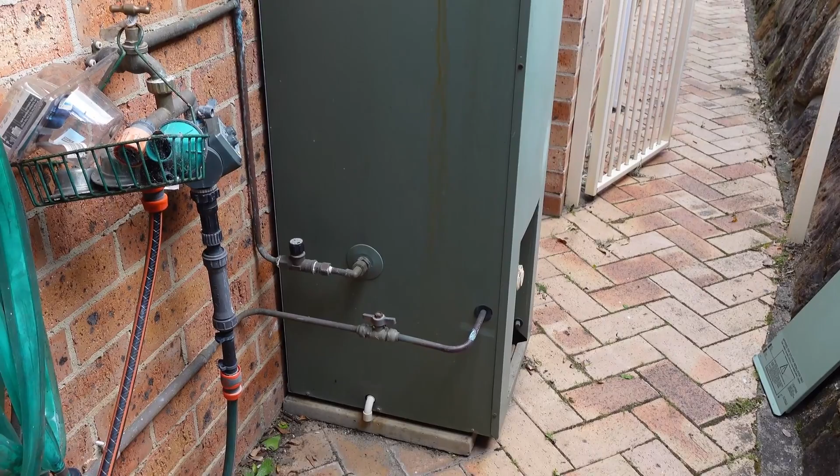Hi, I'm about to have my home gas hot water system replaced with a heat pump system. I've done several videos on this.

The whole idea is that we can use excess solar power. This is the only non-electric thing we've got left. We've got an 8 kilowatt nominal system spread over two different solar panel systems on the roof, one Enphase micro inverter system, one Sunny Boy system, but everything is electric. We've got the electric car, which we charge using the Zappi controller, so it's practically 100% powered from our excess solar energy, effectively a solar powered car, and everything else in the house is solar powered. The only thing left that's gas is the hot water.

We do have an outdoor barbecue, but we're going to change that over to bottled gas since we rarely use it, so a bottle will be fine. Instead of going with a solar hot water system, which would just take up roof space and only be used for hot water anyway, we'll go for a heat pump hot water system and see what the energy requirements are.

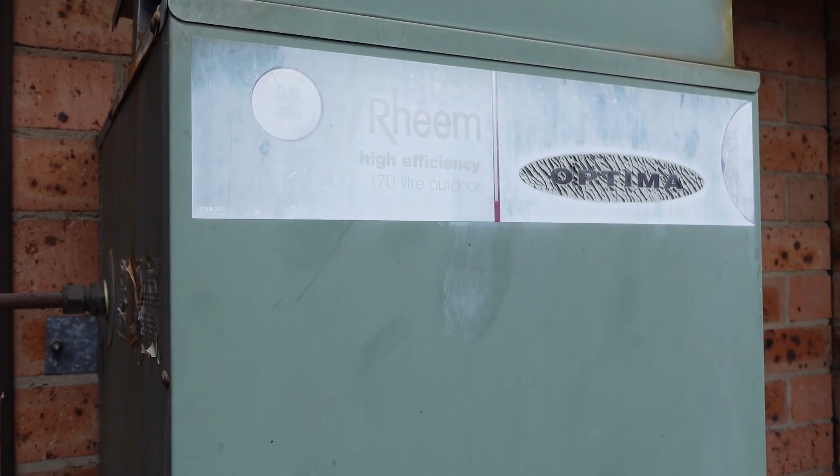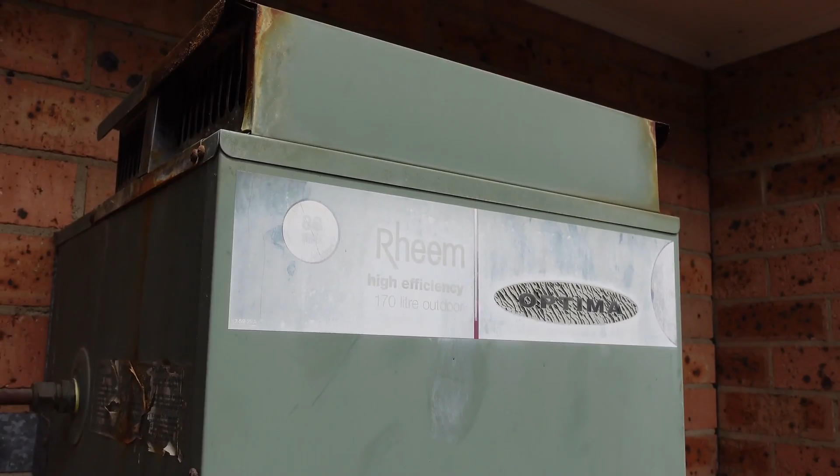Anyway, it's being installed tomorrow. So what I've got here is a Rheem high efficiency 170 litre outdoor unit. It's the 88 series, not sure if you can see that. It's really old, the original one that came with the house. The house is mid 80s, something like that. So yeah, it's still going, it still actually works, we've had no issues with it whatsoever.

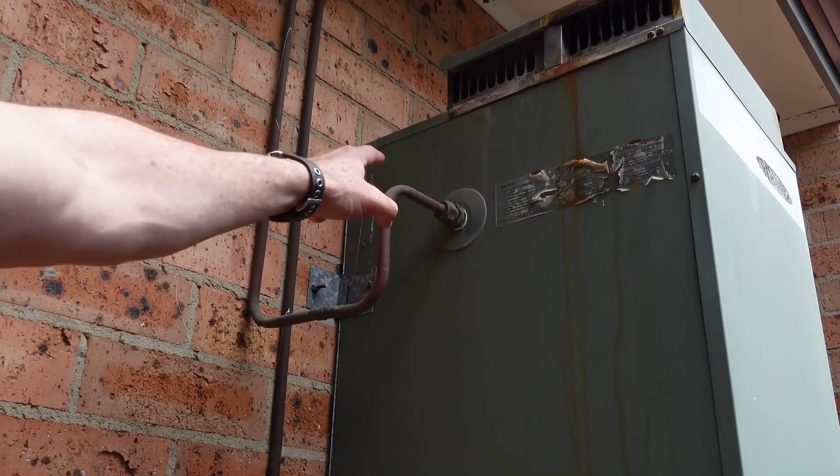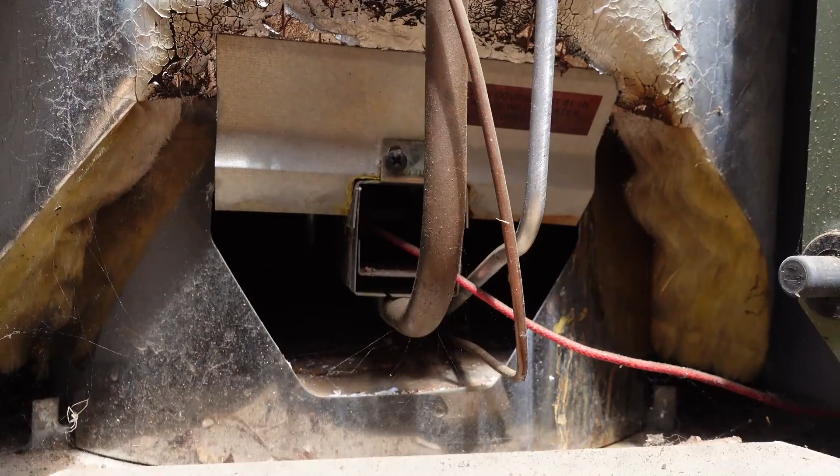Obviously we've got the gas inlet down here, this is the cold water in, and up here we've got the hot water out, and over here we have a relief valve. So I want to check the temperatures, and down here I've taken the panel off. You can see the gas valve, and the pilot flame is under there, we'll have a look at that. It's never gone off, well, maybe once, I think, in the 18 years that we've been here.

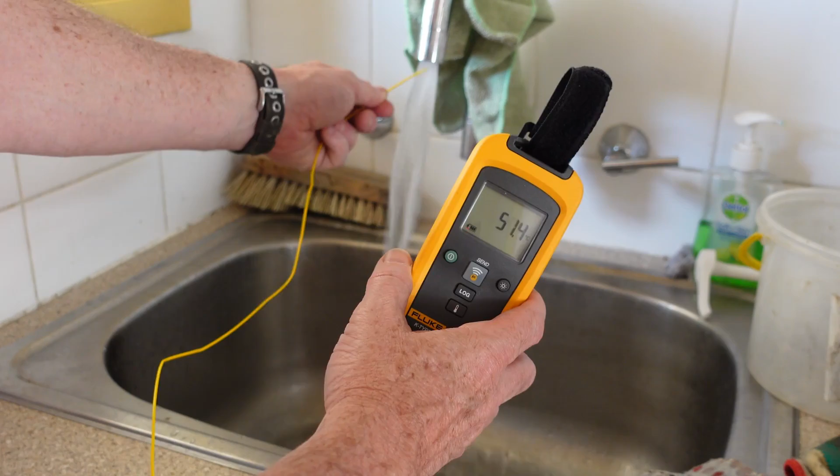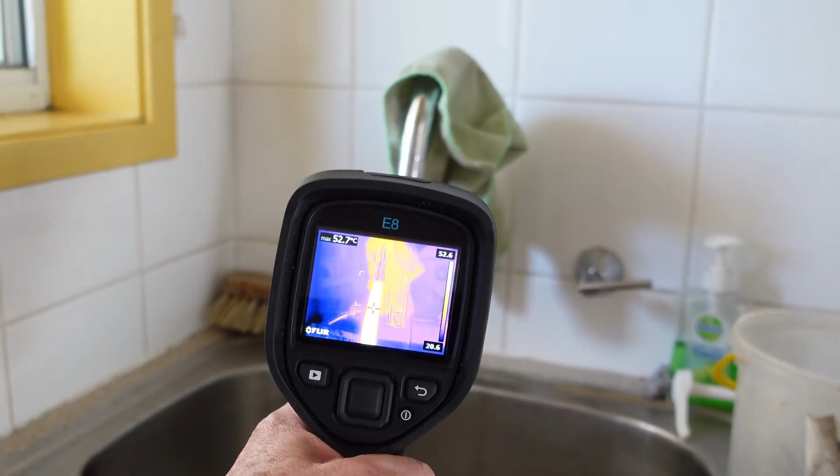This is in the laundry, and no, I don't think we have insulation on the pipes in the roof either. It doesn't seem to be a big deal here. I measured just the other day inside, yeah, 51. It's on par, or only a degree lower, than what we're getting coming out of the relief valve. Of course, there could be a tempering valve in there. I don't actually know what the temperature is inside the tank, but there you go. The thermal is showing 52.5, so I'm going to put that within the margin of error there.

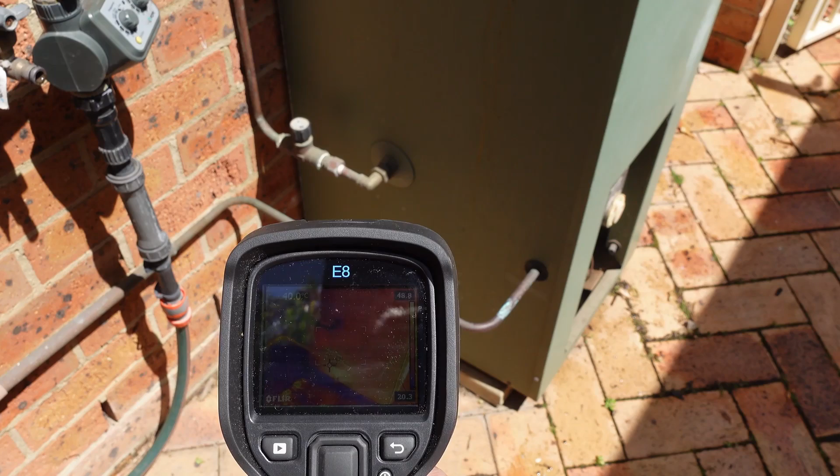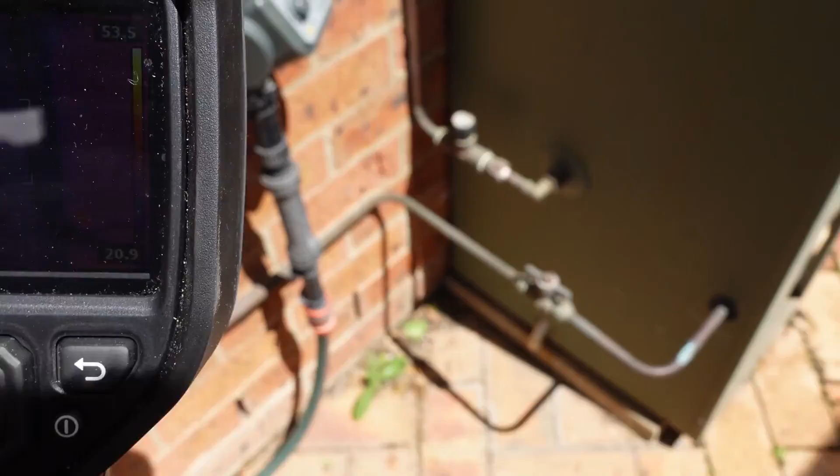If you leave it on for a while, the gas igniter should kick in and start heating up the tank again. Right, so I've still got that running in there, and I can hear it flaming away. That inlet gas valve is like 38 degrees, and the cold water, the coldest, is 20 degrees. So we've got 20 degrees coming in, and we can actually measure that here on the tap as well.

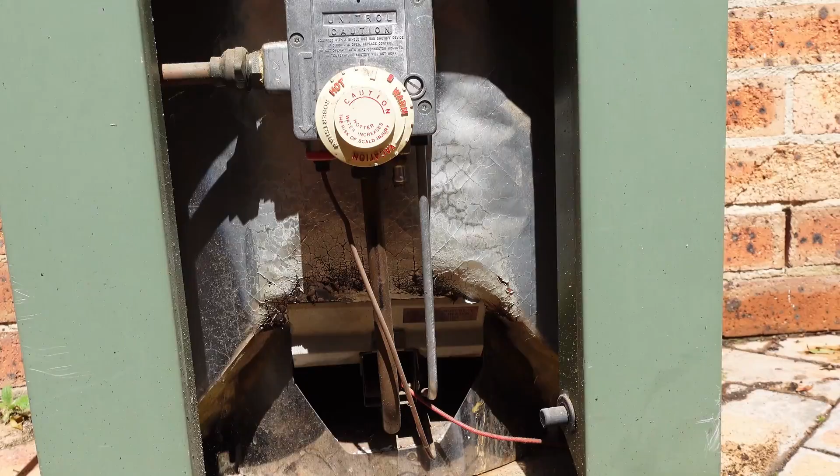I did measure that the other day, and I'm not sure if you can see it, probably not, but it's 247 degrees, because that's obviously the flame lighting this thing. So what the actual internal temperature is in here, I don't know. All we can get is the outlet, the relief valve here, but that could be coming through a tempering valve to prevent it getting too hot. I'm sure that's the case actually, and there's no direct temperature reading on the dial.

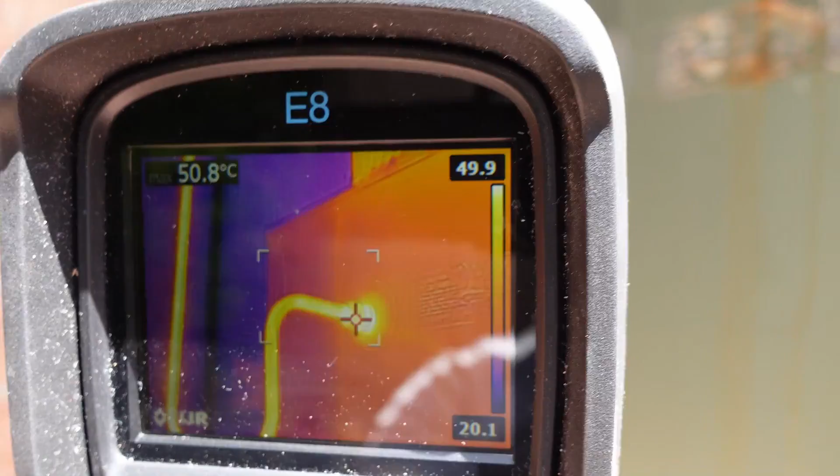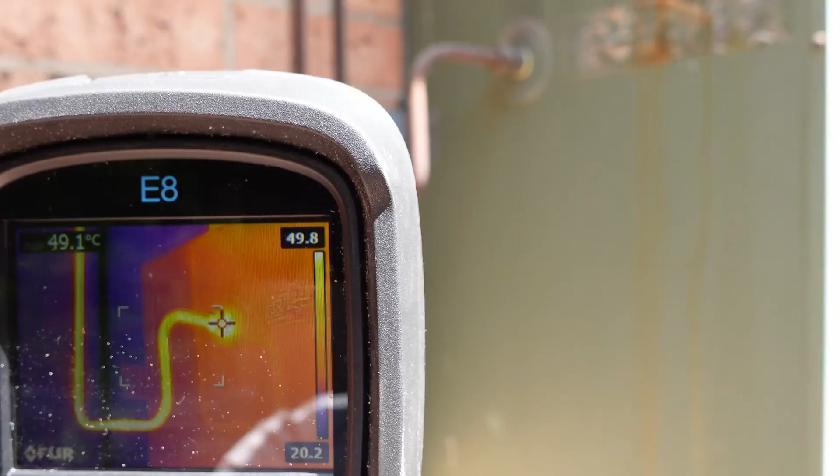So this is the outlet, and that's at 51, hardly dropping anything, but you can see because the water's flowing now, the pipes are hot. There's no loss in those pipes. Of course, it's a nice warm sunny day here, so the roof is probably pretty hot, and we're still in spring here. I've got 20 degree water going in because the pipe comes in from underground, so that's not surprising. And then we've got 51, 52 degrees going out, and we get all of that at the tap, so that's not too shabby.

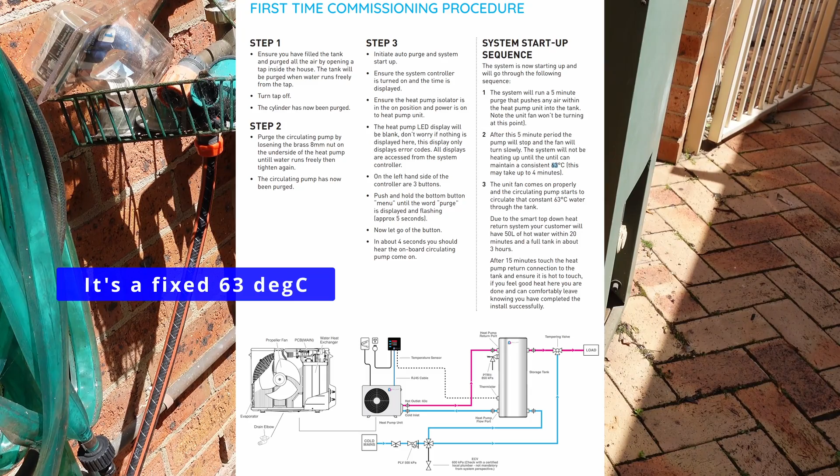We'll find out what the new heat pump system's like, but it's got to run hotter than 60 degrees internally to prevent bacteria and Legionella. I guess you set the outlet temperature. I don't know, maybe I can ask the installer tomorrow, or ask Reclaim what the actual deal is - is it actually hotter internally, or does it have some sort of tempering valve in it? Anyway, that's the before, and we'll now cut to the after.

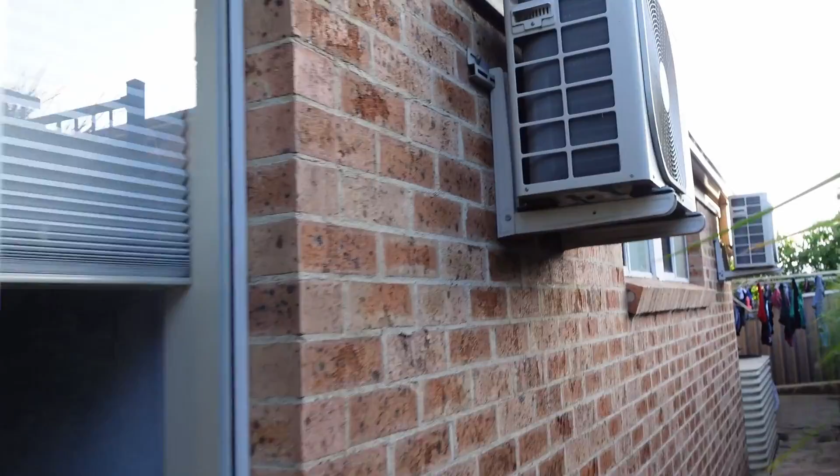And here it is, magically installed. The heat pump is actually much bigger than I thought it would be. I thought it'd be a reasonable size, but you can see it compared to our aircon - okay, it's a similar size to our smaller aircon unit.

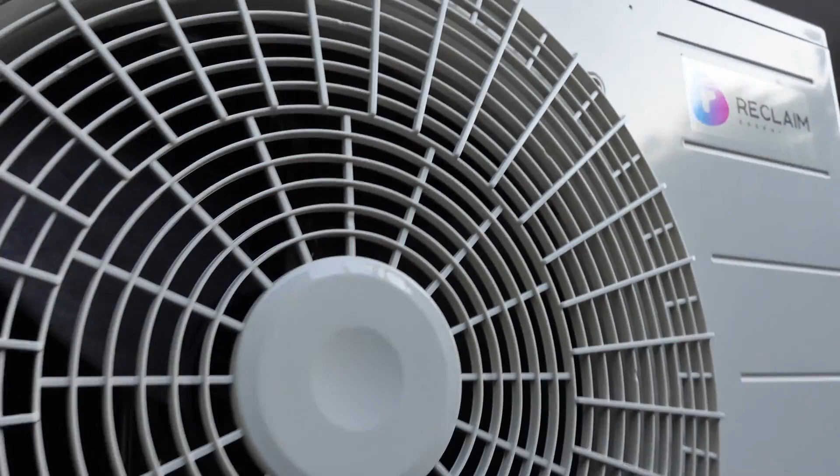This is a Mitsubishi jobby, as is this unit here. It's got Reclaim Energy's badge, but I've been told it's manufactured by Mitsubishi. Here's the model - that could be a Reclaim model number - made in Japan. All the best stuff's made in Japan.

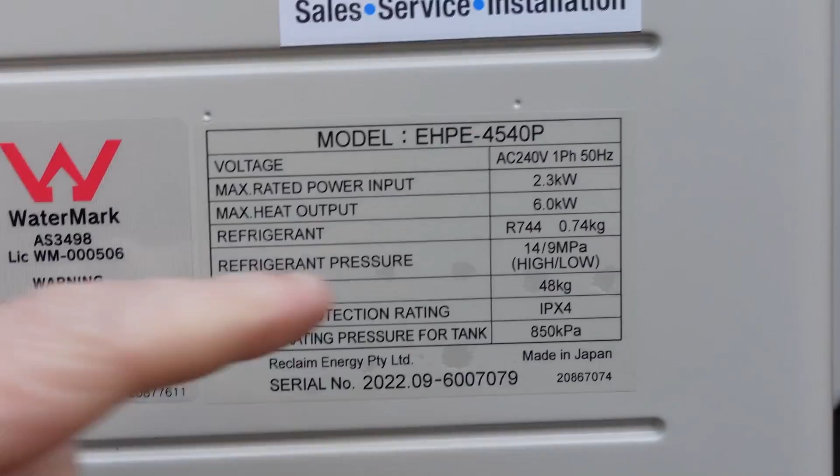It says 2.3 kilowatts, but I was trying to measure the consumption remotely today. I think it's around the 1 kilowatt mark, but I won't know until I get the power meter on. They installed an extra double power point here - one for the controller and one for the heat pump.

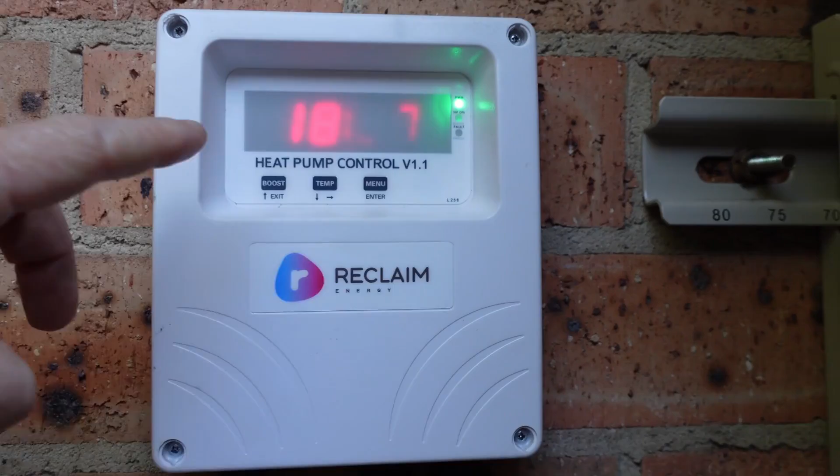You can see the scanning - I can actually see the flicker on this LED display. It looks worse on camera because of the shutter. Anyway, I have to RTFM on that, but they've set it to come on from 10 a.m. to 4 p.m. or so, so we use the excess solar. I might tweak that time somewhat.

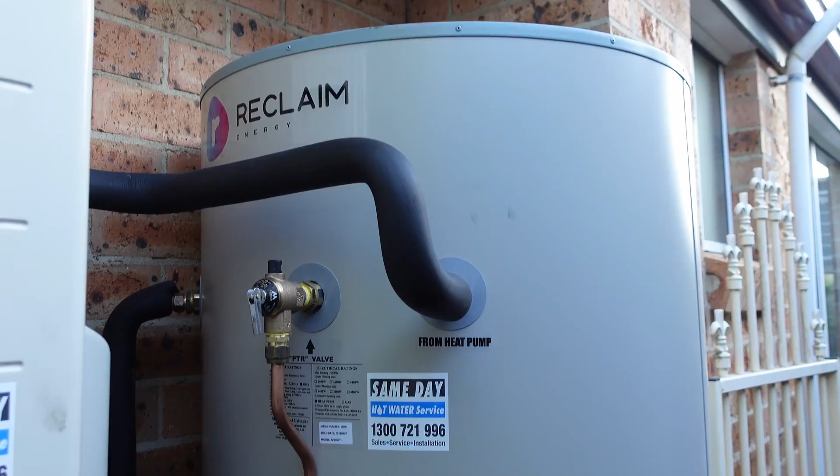It's got a thermocouple input, which goes down to what they call a sensor well down here, basically, and that's got the thermocouple. And this is the 415 litre tank - as I said, it's the biggest one they make.

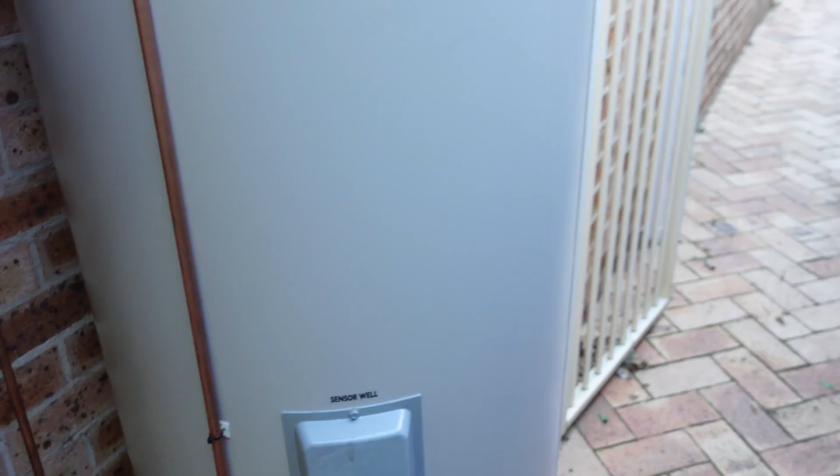It's absolutely massive. They mounted it on a polycarb base, and it does obscure the pathway through the side gate here a little bit, but we rarely use it, so that's not a big deal.

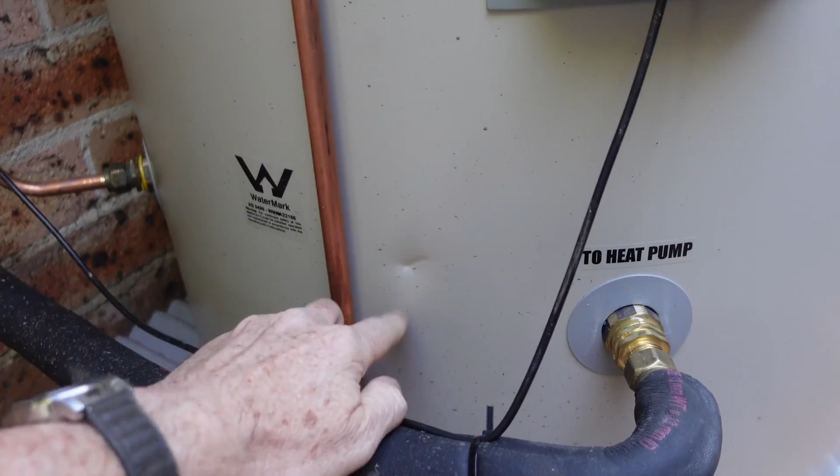It's a stainless steel jobby, and it did come pre-banged up. Look at this - they showed me that when they got it off the truck. They didn't do it getting it off the truck - I believe that was like it just came out of the box. They unwrapped it and there it was. So yeah, it's good enough for Australia.

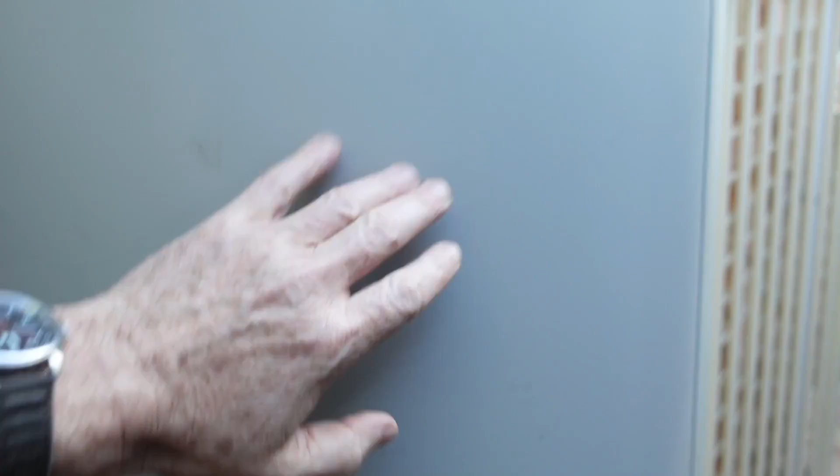This is not the actual tank - the tank is actually inside this outer tank, surrounded by insulation, because I can't feel anything on this, it just feels ambient temperature to me, but it's actually already filled with 63 degree water. I think that's set internally - you can't actually change that. It's manufactured here in Australia by Metal Dynamics Proprietary Limited.

It says 400 litres, but I believe it's actually 415. Anyway, we've got the standard relief valve here, and yeah, I can feel that's pretty warm. We'll get some water coming out and I'll measure that - it should be 63. Let's follow the pipework here.

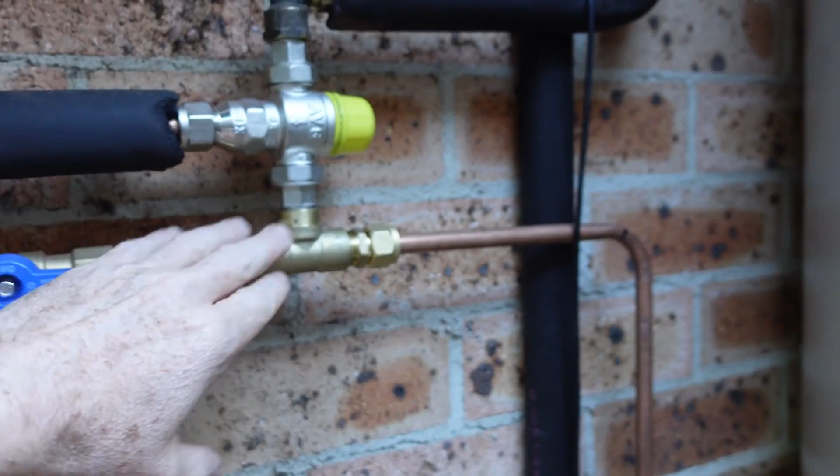So we've got our cold water coming in here, that comes from up the top here, that just goes to a tap here. Then the cold water goes around here through - we can actually switch it off - and then it goes, well, I'll tell you about this in a minute, but it goes down into the bottom of the tank here.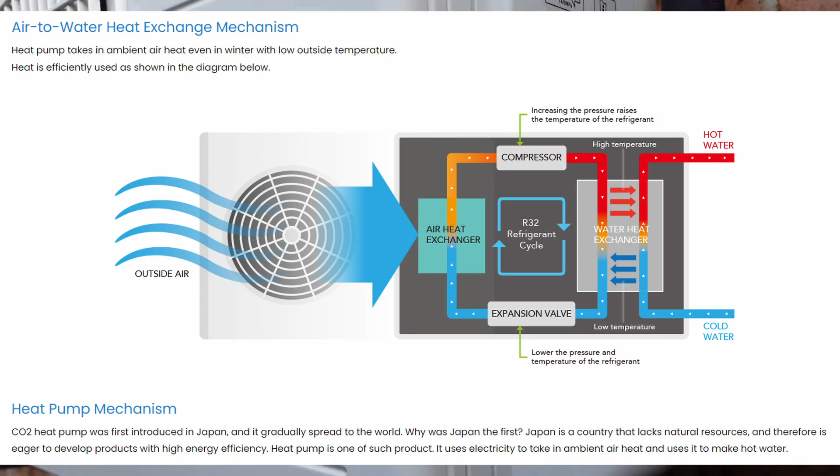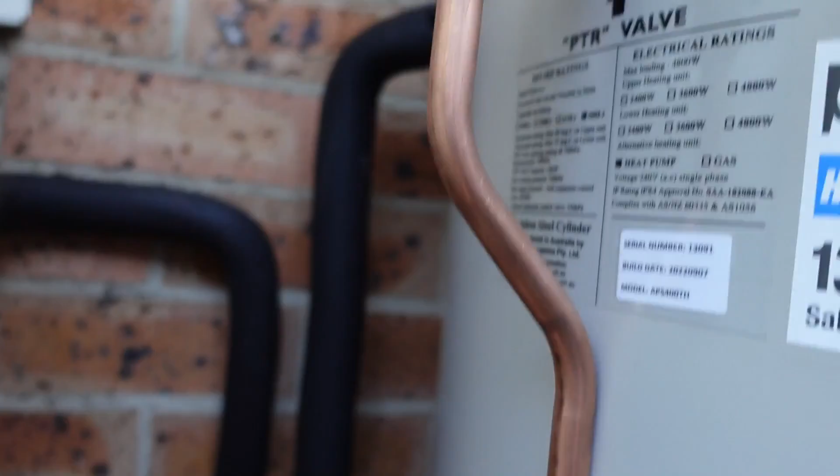Then the bottom water in the bottom of the tank goes up into the heat pump, which is this bad boy here. Due to heat pump action - just look at how any aircon works, and it's the same way, or a reverse cycle aircon, it's exactly the same thing - you get your nice hot 60 degree water coming out of here, and that just goes into the top of the tank there. Then this one on the other side is the outlet. So this is just a storage tank, there's nothing else inside it. It comes down here.

So this is our hot water output, and this goes into what's called a temper valve. These are required under Australian law, and for just common sense, because you don't want 63 degree C water coming out of your tap - that will ruin your day.

You can, yeah, give yourself serious burns with 63 degree water very quickly. So the temper valve mixes the cold water coming in with the hot water down to a preset temperature. It's got a little plug on the end there, you can flip that over and adjust the temperature - I don't know what it's set to. Usually they're set to like 50 to 55 degrees, because you don't want it too low, then you're using too much hot water to get the temperature you want.

But you don't want it too hot to burn you. So the old gas one, we were getting 50 degree water out. Anyway, that's a very cool device - it's completely mechanical. It uses some sort of diaphragm that changes with temperature. Not exactly sure how, but yeah, very cool.

And then that just goes into the house. So that is it - that is a heat pump hot water system. As I said, the old tank was 173 litres, this is 415. In a normal day we won't use much of this capacity at all - we'll probably use like 150 litres.

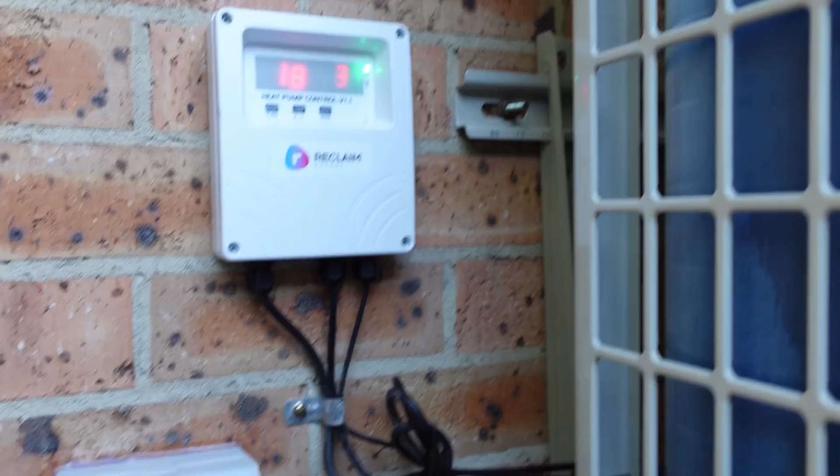Good thing about this is that I can whack power meters on here easily, and we can find out the controller's on all the time, so we'll have standby consumption of the controller, and standby consumption of the heat pump as well, so I can measure both of those.

They did install an extra fuse - there it is, it's the one on top there, hot water. It's a 20 amp jobby just for that outlet there.

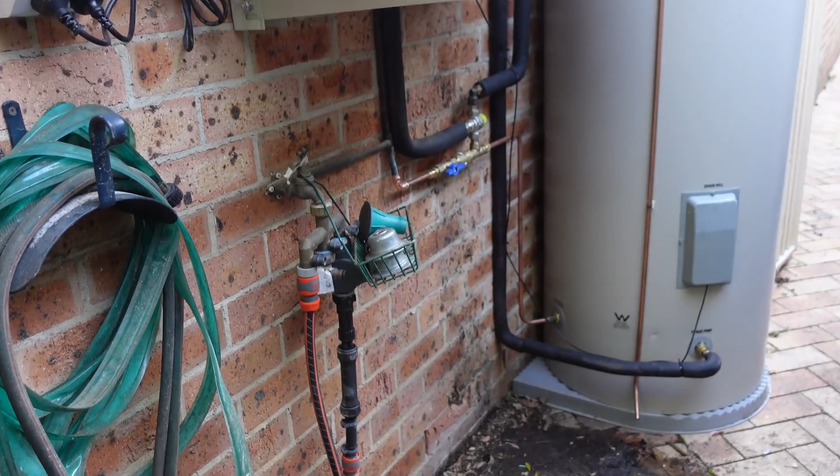They decided to mount it up on the bracket just because it was too much hassle to move the tap and everything else. Also, if you get a flood in here, you don't want it sitting directly on the ground - you'd have it offset, of course. But now we can put some stuff under there as well, so we can use that space if we need to. That is very cool.

Yes, lots of people have asked - yes, a tank outside is very common here in Australia. For a house it's probably the most common thing. Like the house that I grew up in, which is probably a late 60s house, that actually had the tank in the roof, but I don't think anyone does that anymore.

So we'll use it tonight as a normal night, and I'll measure the consumption tomorrow to see how much energy in kilowatt hours it takes to reheat the water that we actually used.

Temperature of the water coming out of here, yep, it is 61. And my first test out in the laundry again - yeah, it's hot, oh yeah, it's Ernie Bernie. They set it to 55 by the looks of it, which I think is what they said they would set it to, but that is 4 or 5 degrees hotter than what we had it before.

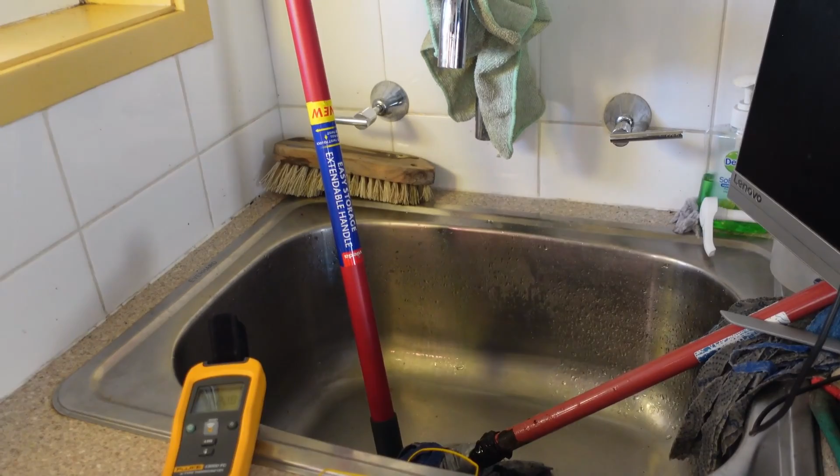You'll use less hot water, of course, because you physically mix in more cold water with it to get your desired temperature for your shower or your sink or whatnot. So it's probably good to have it a bit higher, but geez, I wouldn't want it any higher than that. That really is Ernie Bernie.

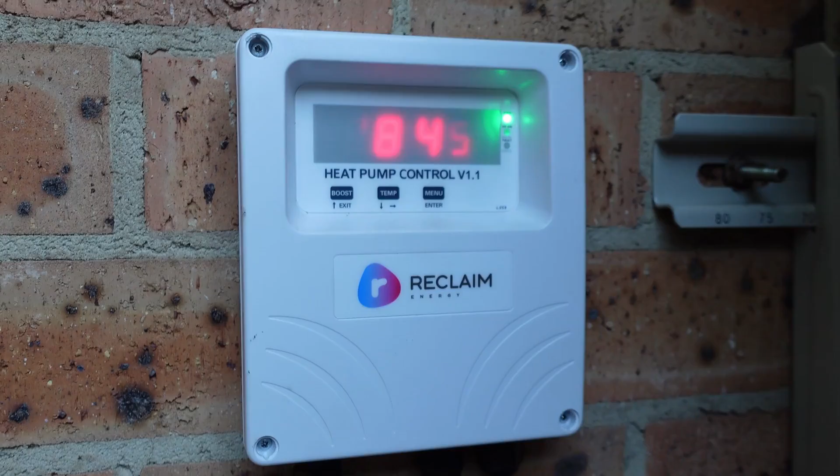Standby consumption of the controller here, about 0.9 watts. That's all right, no wuckers. That's 1.8 VA. And we'll see what the pump takes - I'll switch it on.

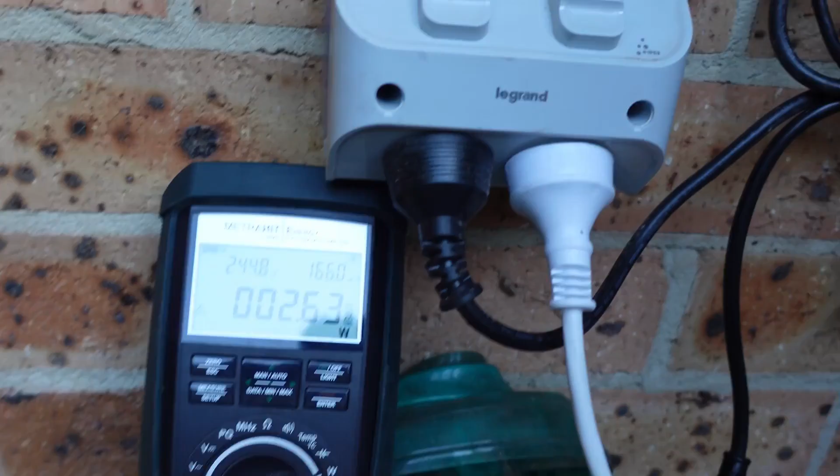Nah, didn't do anything. Nope, fan's not going, nope, nothing. So it's drawn a couple of watts in standby. VA on that, oh yeah, pretty terrible.

40 VA, but as I said, power factor of 0.07. Yeah, that's what happens with these sorts of things, that's what you'd expect. It's terrible, Muriel. But yeah, I only pay for the watts, so 2.7, 3 watts, yeah.

So let's run through the numbers of what I actually measured and compare it with what I thought I would get before I actually installed this thing, because this whiteboard might be familiar to many people, or at least the people who are subscribed to my second channel, EEVblog 2. I did this quite some time ago.

This is the original whiteboard for it, where I actually went through my old gas hot water and how much energy it actually used in megajoules, and converted that to kilowatt hours, and what it was costing me. I was able to get a kilowatt hour figure per day and cost per day.

I was able to then speculate what I would actually get when I installed this Reclaim 400 litre heat pump system. So did it work out? Well, not really. I was a little bit off, and we're going to find out why.

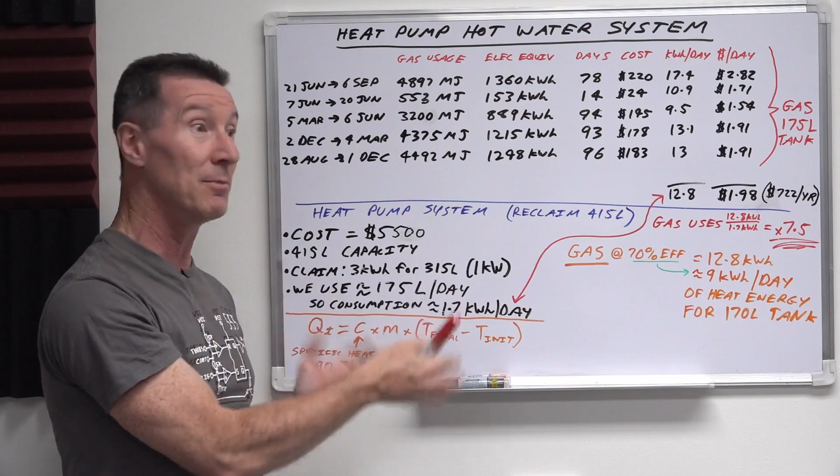The reason we can do this is because on your gas bill, typically it tells us the figure in megajoules, and that's just energy. You can convert energy from one unit to another. So the equivalent megajoules here, you can actually convert to kilowatt hours.

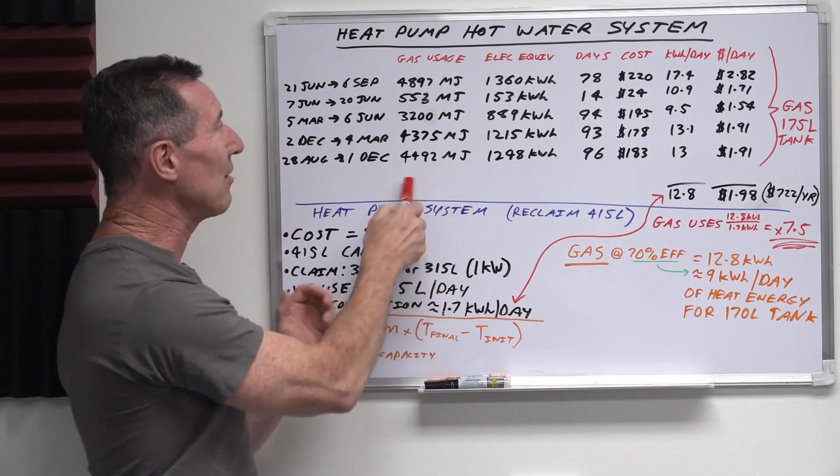There are a couple of little factors in here which they'll have on the bill, like the pressure and the environmental factors and stuff like that. But those figures are fairly stable, so we can actually convert that to kilowatt hours, and that's what I've done.

It turns out that if I averaged it over an entire year, my gas system every day was taking the equivalent of 12.8 kilowatt hours per day in energy.

Now, of course, we're not going to go into the difference between the embodied energy in gas, to actually mine and produce the gas and transport it, versus what is required to manufacture the solar panels and all that embodied energy stuff. It's a really complicated equation. We're just simply comparing how much energy a gas system uses versus how much energy a heat pump system uses.

Based on Reclaim's figures, they've got a figure of 3 kilowatt hours energy consumption for 315 litres delivered per day. And that's for typical usage for like a family of 4.

Now, we actually use less water than that. 315 is a lot because our old tank was only 175 litres. We did run out of that occasionally, but on a normal day we'd get nowhere near running out. So I don't know, we might use 120 litres, I'd be guessing.

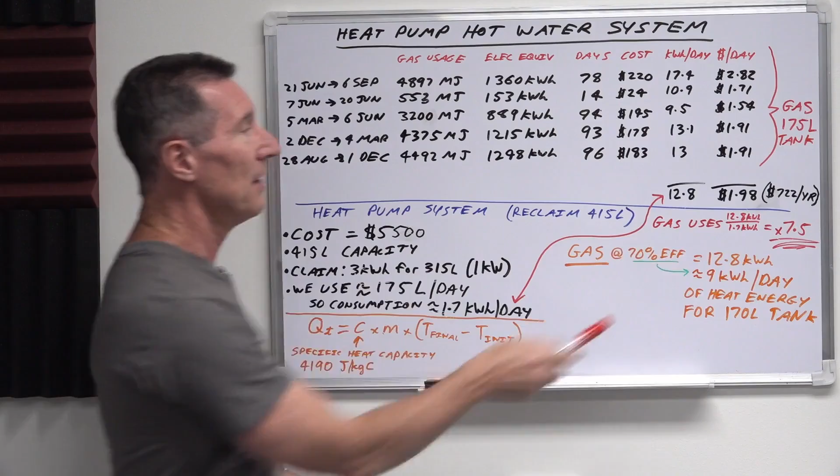If you're playing along at home, that actually works out to the cost of almost $2 a day to supply and deliver the gas energy. So that's $722 a year, and that goes into the payback period and stuff like that. But we're not really worried about that in this video.

We just want to have a look at how much energy is being consumed by our heat pump system and how it actually works. They also claimed that the power draw is around 1 kilowatt. Remember the difference between power and energy? I've done a video on that. Kilowatt hours is energy. Kilowatt is the instantaneous power it's actually using, and it's around about 1 kilowatt.

Mine varied from about 950 watts up to about 1.15 kilowatts, something like that, depending on the day, where it was in the cycle and all that sort of jazz. But yeah, their 1 kilowatt figure is pretty much spot on.

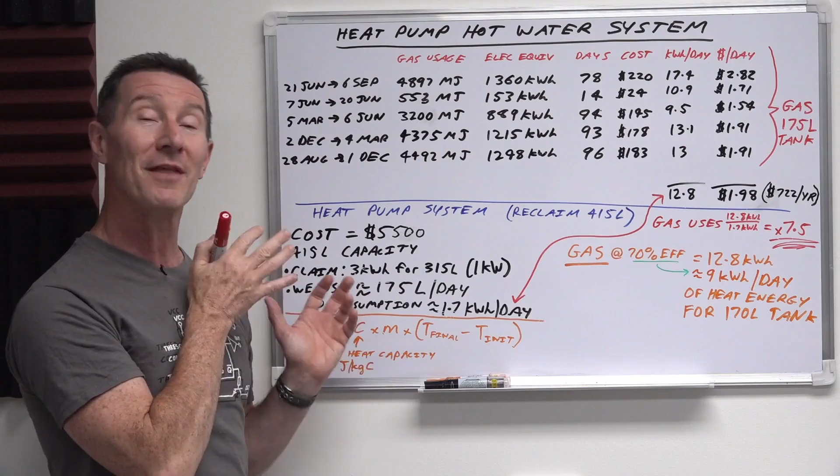Now, the good thing about it only drawing 1 kilowatt is because the entire purpose we installed this heat pump hot water system is so that we could use our excess solar energy during the day instead of just exporting it to the grid and getting paid an absolute pittance for it.

So we're effectively using this new 400 litre hot water tank as a thermal energy battery. That's essentially what it is. We're putting in that 3 kilowatt hours per day, for example, and we'll go into the figures on the next whiteboard, but we're basically storing that energy. So we've pretty much got like a 3 kilowatt hour battery there, but it's being used as thermal storage, which we use mostly at night when we shower, and then it reheats during the day.

The Reclaim system comes with a timer that only works between 10am and 4pm when the sun's shining. And pretty much, even on a really bad day in the middle of winter, we're easily going to have 1 kilowatt of excess power available for our nominal 8 kilowatt solar installation.

So after we've installed it here, remember, this is a real pricey system. This is probably one of the, if not the most expensive heat pump system you could get. You can get ones like half this price or even less, but we went with the best quality made-in-Australia one.

So what did I calculate? Based on their nominal 3 kilowatt hour claim for 315 litres, I knew we weren't using anywhere near 315 litres per day, even though we do have a family of 4. So I actually took the existing tank as a measure, 175 litres per day, and then you just work out the ratio there, and I calculated roughly we should only use 1.7 kilowatt hours per day.

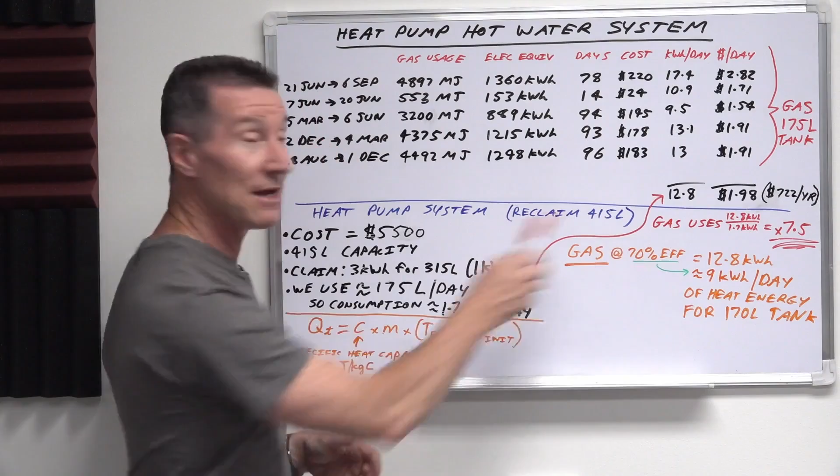And how much energy did it use per day? Average over the year, 12.8 kilowatt hours per day. So if we calculate 70% efficiency of that, it's basically 9 kilowatt hours per day of heat energy being put into that gas tank.

The rest is lost on, I don't know how the flame works, the flue and the whole actual heating up of that thing. But it seems we were actually putting around about 9 kilowatt hours per day of heat energy into the water. And you've got to remember, that's for a 170 litre tank, okay.

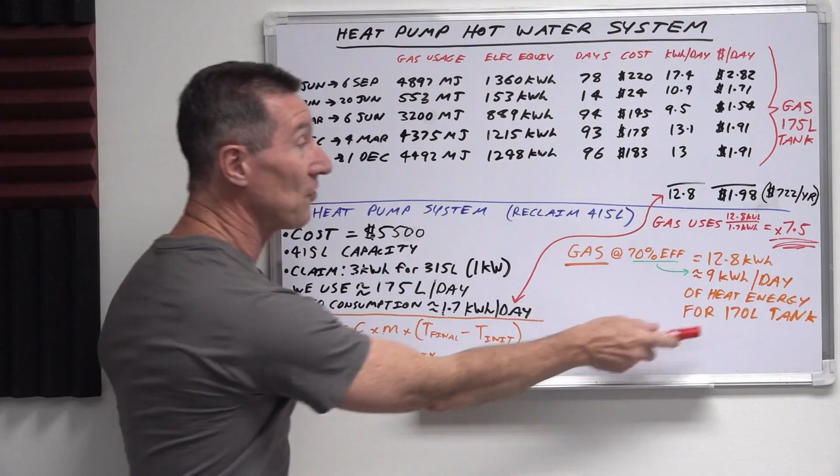My new Reclaim one is 400, well nominal 400, litres. I think it's about 415, but I think it's about 420 litres is its real capacity. So for a much smaller tank, 9 kilowatt hours per day compared to 3 kilowatt hours per day, which Reclaim claim here.

And well, it's no contest, just in terms of pure energy consumption, a heat pump hot water system, in particular a CO2-based heat pump system, because the new CO2-based systems are a bit better than the old school refrigerants used. They now use CO2 as a refrigerant in the more modern heat pump systems, and they're more efficient. They have a greater coefficient of performance, or COP.

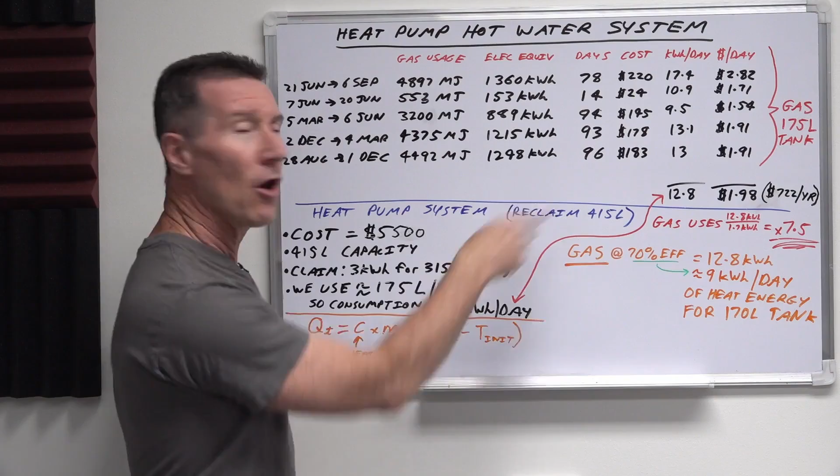But yeah, there's no contest. A heat pump hot water system wins hands down compared to a gas system in terms of energy consumption.

So let's now magically look at the results that I got over 9 days. And here it is. There were actually some days before that, but I wasn't measuring all the parameters, and then the power failed. I've done a second channel video on that where my power actually ironically went out. Anyway, that's a second channel video, go watch it.

So I've got data over 9 days, okay, for my new Reclaim 400 litre, nominal 400 litre, CO2 heat pump hot water system. And we'll go into how it actually works in a minute in terms of the tank. But what I've got here is how much energy did it use per day, because I was putting an energy monitor on it every day, and I was able to measure, anywhere from 2.54 to 3.13, I think, seems to be the range of kilowatt hours energy per day.

So it's basically an average of 2.83 kilowatt hours per day, and that's not far off that 3 kilowatt hour claim for 315 litres consumption that Reclaim make. So why are we getting near that, even though I can guarantee we're using nowhere near the 315 litres, let alone the 400 litre tank that we've actually got here?

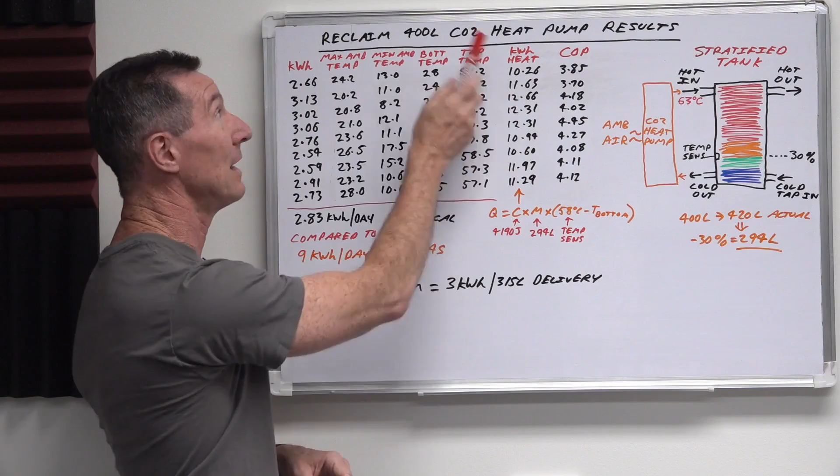Well, it turns out that those are just marketing figures. Now, they did actually give me some data for a site that they have in Tasmania, which is right down the bottom end, the map of Tassie.

Little Aussie joke there for my Aussie audience will get what I'm referring to there. Anyway, it's quite cold down in Tasmania. But as it turns out, the CO2 heat pump hot water systems do actually work better, they're more efficient, ironically, in a colder climate like that.

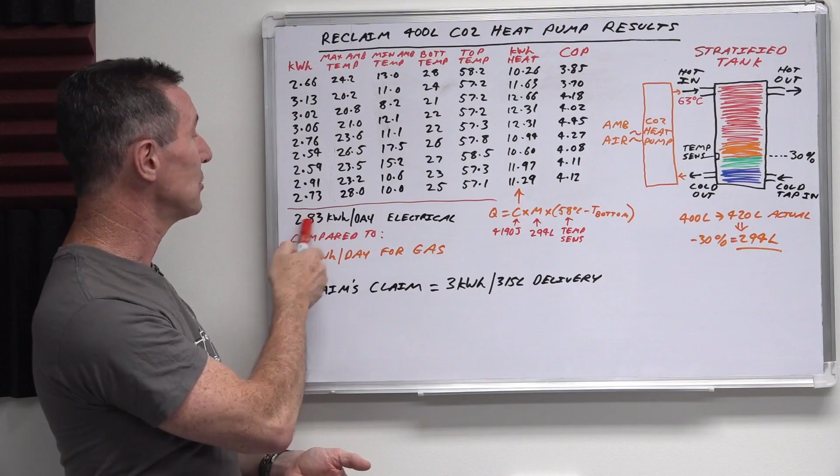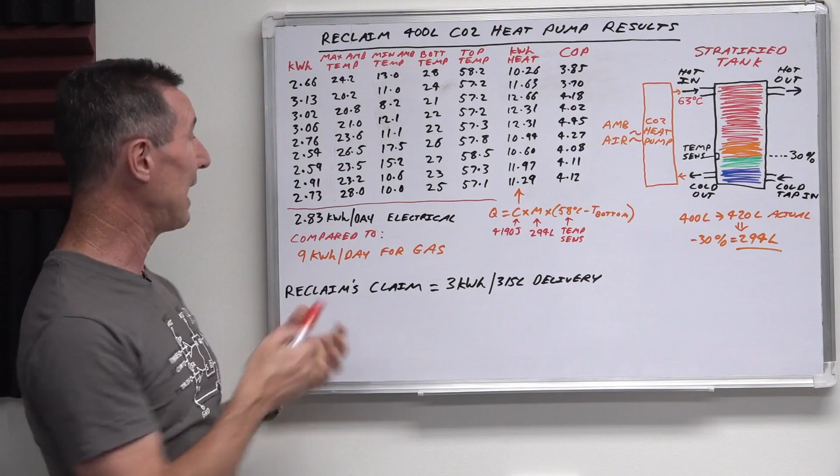That has to do with the high pressure used in the CO2 based heat pump systems and the differential between the ambient temperature and the output temperature. So yeah, it makes a difference. So obviously their figures are coming from a more optimal environment. But anyway, my figures will actually change, I expect this average figure to change. It'll have a seasonal component as well, but it's almost summer here, a couple of weeks away from summer when I got this data, and well, 2.83 kilowatt hours per day, it's more than I was hoping for, but still not too shabby.

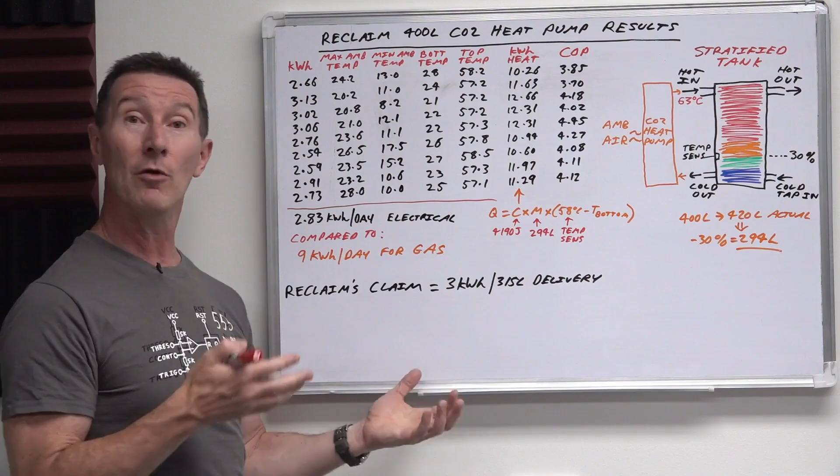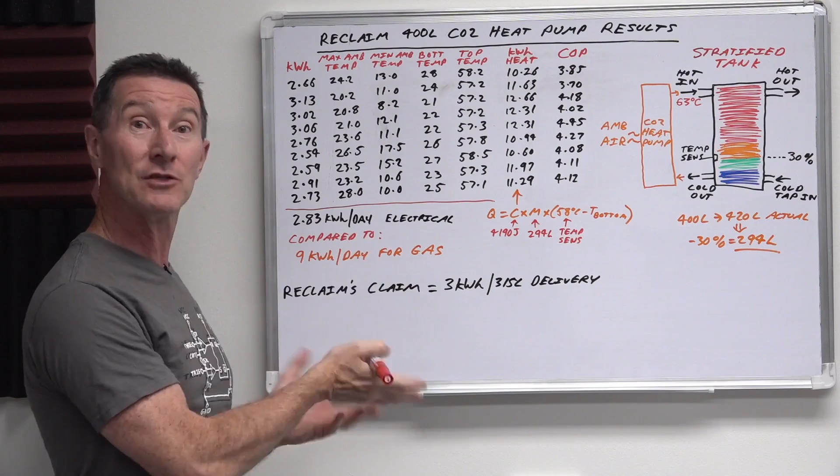And we've easily got like 3 kilowatt hours per day excess energy that we're just exporting to the grid, getting paid a pittance for, and we're now actually storing that. So I've effectively got, let's just say, a nominal 3 kilowatt hour thermal battery system. Beauty. So once again, right off the bat, it's under 3 kilowatt hours per day, or more than 3 times better than the equivalent 9 kilowatt hours per day for gas. That was actually the heat energy going into heating up the gas hot water system. It's 3 times better on a pure energy basis for heating up the water, let alone the losses, because this figure already includes the losses.

So what other data did I get? Well, I got the maximum ambient temperature for that day. I didn't log that myself, I just took that from the Weather Bureau, but that was the peak temperature in our location during the day. Then I got the minimum ambient temperature as well, that's the overnight temperature. And then I got the temperature in the bottom of the tank.

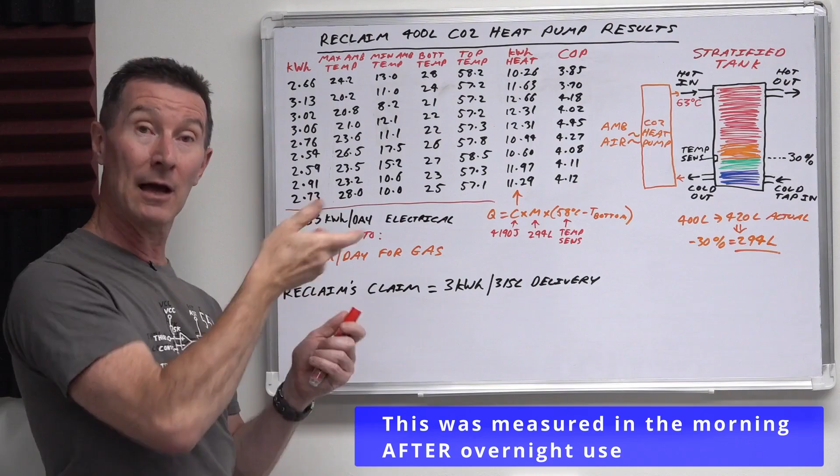We'll go into the exact location of that in a second. And then I got the temperature in the top of the tank, which is actually the relief valve temperature, so I could actually measure that directly. This one came from the thermocouple inside the reclaim unit, I can hit a button on there and get the bottom temperature. So basically, this bottom temperature of the tank was the starting temperature at 10 a.m. when it switched on, and it had to heat up from that to 63 degrees C.

So what I've done is I've tried to calculate the COP, or coefficient of performance, of this system, even though we can't really do that because we don't have enough data. Even though I've got all this data, we still can't really do it. And let me explain why. But I'm trying to get a figure.

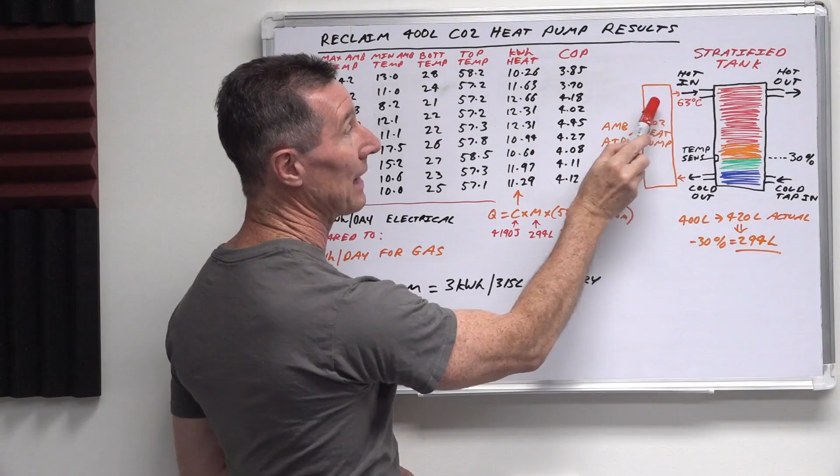Anyway, the coefficient of performance is the amount of heat energy you get out - remember, this is heat energy you get out of the system. In this case, basically what comes out of the heat pump here, the 63 degree water here, the energy that comes out of that divided by the electrical energy you put in to power this, 2.83 kilowatt hours per day to actually get that amount of heat energy out. So it's just a simple ratio, this COP.

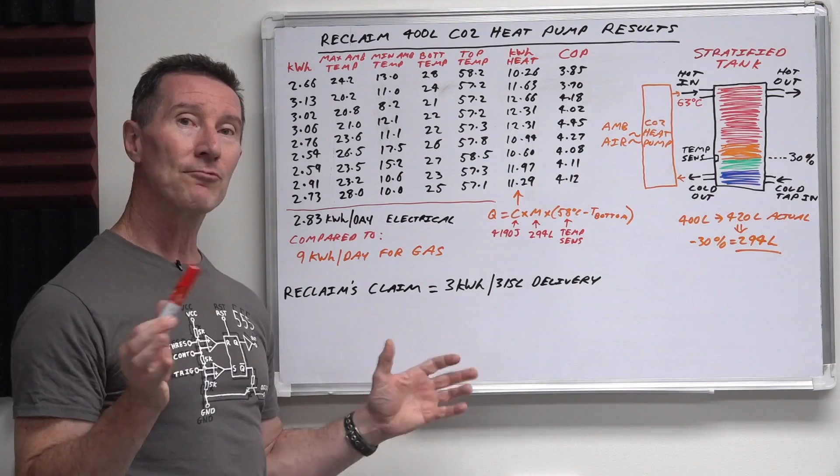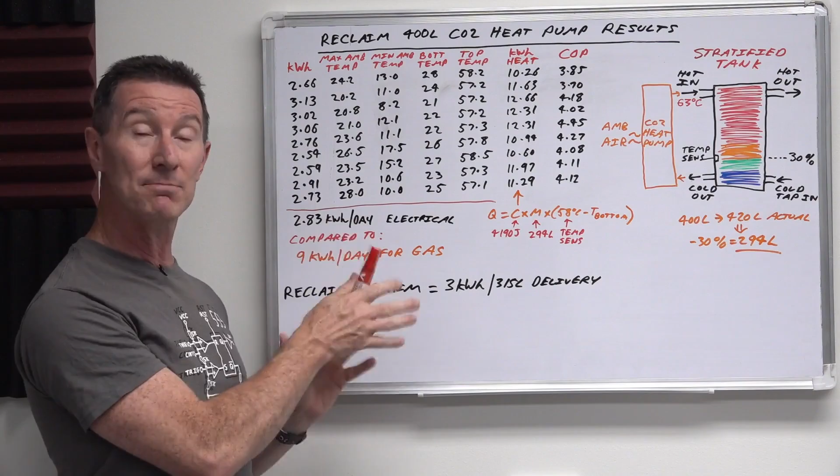And Reclaim actually claim a coefficient of performance up to like 5 times, and that's the sort of extreme end for a heat pump system, but this is a top quality one. It's the new high efficiency CO2 based refrigerant in there, and it gets maximum, it's pretty much one of the best ones you can get on the market. So I don't think we're quite seeing those figures, but as I said, I don't have an exact figure. It'll depend on environmental factors, incoming water temperature, ambient temperature, the amount of how you cycle the tank, and all sorts of stuff.

So what I've done is also calculate the amount of heat energy required to heat up the water, in this particular case from the bottom starting temperature, and I've got to go into the details where this is a bit warm and fuzzy, but it's the best I can do with the data we've got available, as I'll explain in a minute.

So Q here is the amount of energy required to heat up a body of hot water. And because we're talking about water, we need the specific heat of water, which is around 4190 joules, multiplied by M, the mass of the water.

In this particular case, we've got a 400 litre tank. It's actually 420 litres, so they just round it down for marketing purposes, but the actual volume is 420 litres.

But here's the interesting thing: the temperature sensor where they're getting this bottom temperature from is at about the 30% mark on the tank. I've verified all this with Reclaim, by the way. They've actually sent me data on this, which is where I got it from.

So I'm going to subtract the bottom 30% of the tank and assume that volume isn't being heated up. I know this is a little rough, but we're just having fun here trying to calculate a rough COP, a coefficient of performance. So that gives us a volume of 294 litres.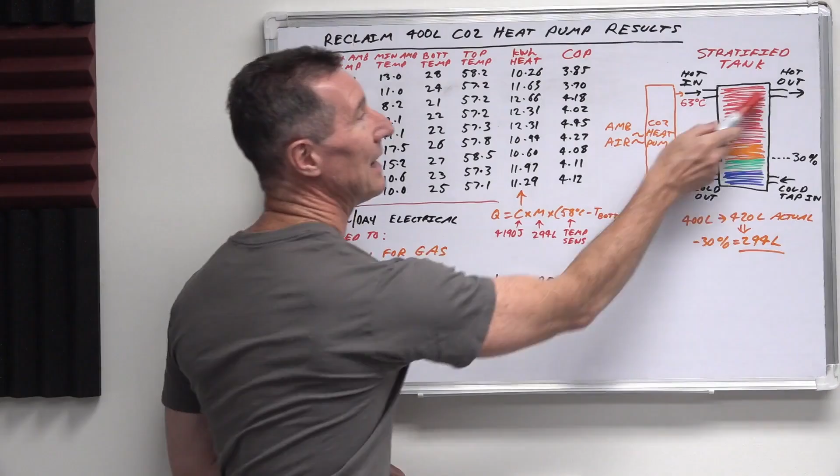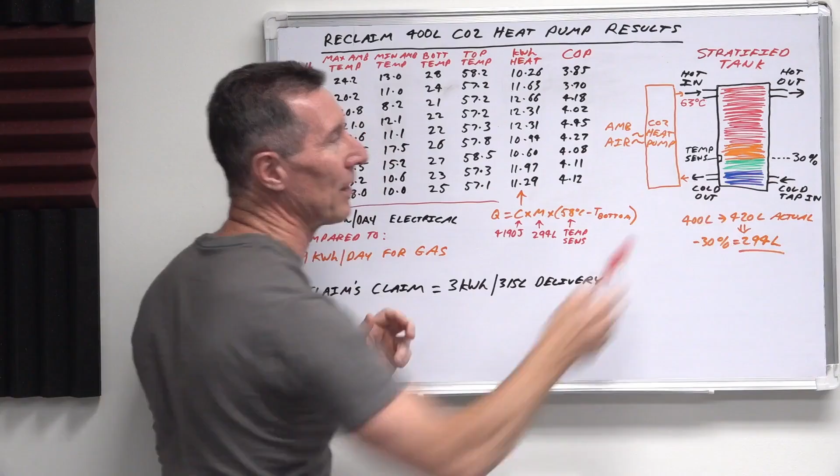And then during the night when you shower, it's just being pumped out of the top here, and that thermal layer, sort of stratification layers, just sort of go up as the extra cold water comes in, because remember this is mains pressure fed, so there's cold water being fed into the bottom, and there's hot water coming out the top, so those stratification layers move up like that, and how they mix and all that sort of stuff, I don't know, but there are thermal layers in there.

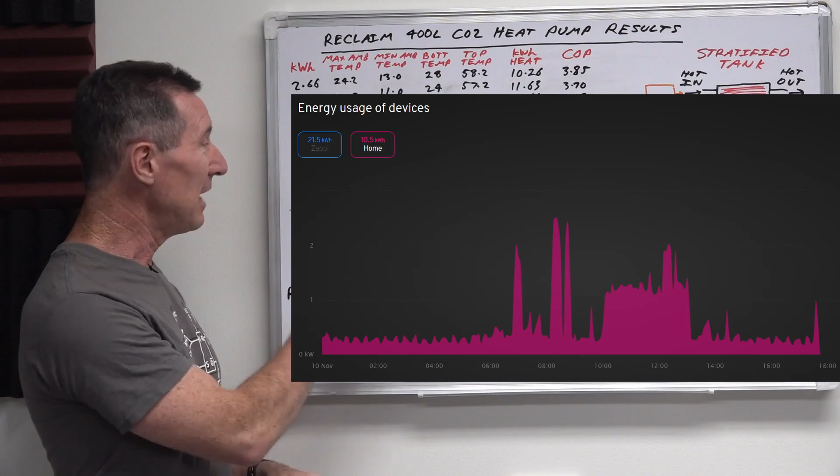And I did actually capture one day where the heat pump did turn on. This was actually the first day we used it. And you can see here that there was a 3-hour window where it switched on, pumping anywhere from 950 watts to about 1.1 kilowatts. That's about 2.83 to 3 kilowatt hours on average over that 3-hour period, and that was enough energy to heat a 420 litre tank.

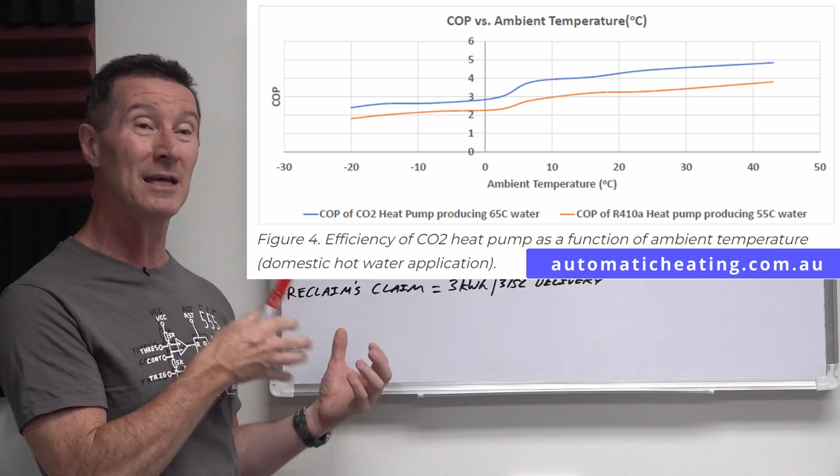But there is a semi-complex trade-off with the incoming water temperature and the ambient air temperature and the pressure of the refrigerant used and the thermal insulation of the tank and the size of the tank and the amount of water flow that you're using, all that sort of stuff. You really can't measure these things, unfortunately, unless you have proper water flow meters and proper temperature sensors in there. But I've done the best we can, so it's not too bad, I rather like it.

So there you have it. I hope you found that as interesting as I did. I love getting data like this and analysing the results. And, well, am I initially happy with my heat pump hot water system? Yeah, I am, even though I expected a bit less power consumption based on the amount of water that we actually use. It looks like it doesn't really make a huge amount of difference.

And if you go in and analyse individual numbers like this, it's hard to correlate anything because we don't know the exact amount of water that we actually used, and it's just difficult. All we can do is ballpark stuff. Even though we've got exact measurements for some things, it's going to vary quite a bit with the amount of water used. And I'm sure you think you have the same amount of showers every day, but you probably don't, and there's a couple of baths thrown in there as well, I believe. So I do have those noted in my data somewhere, but I couldn't really find any correlation there.

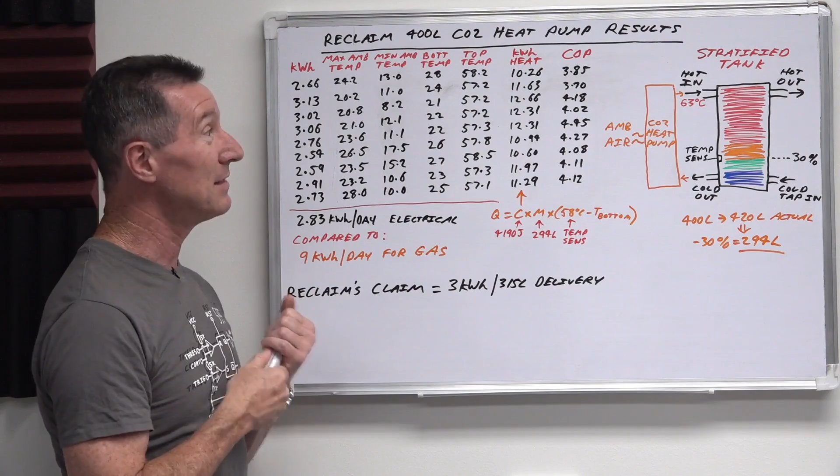So it looks like we deliberately went for the bigger tank, and it looks like it's a good thing because we'll now have much greater heat capacity, a greater thermal heat sink effectively, for really not much, if anything, more in energy.

So yeah, I'm quite happy with it. We're using our excess solar energy, around 3 kilowatt hours per day. As I said, that'll be seasonal, but we've got more than enough excess energy. Sometimes we're in double digits, just throwing away exporting to the grid per day.

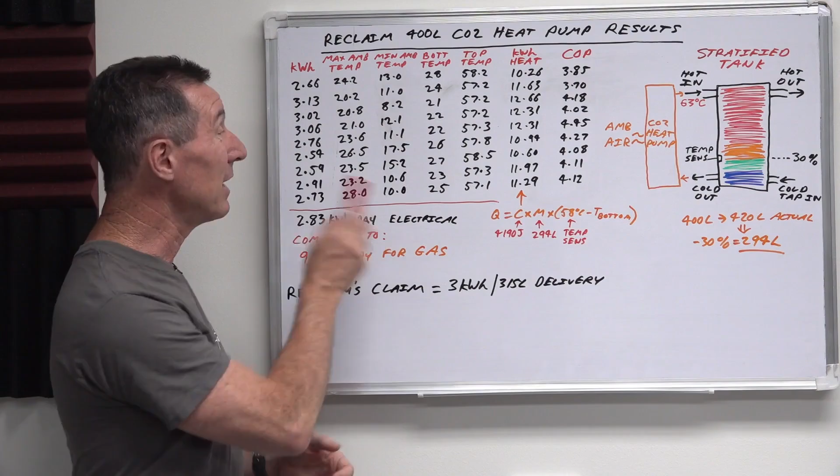We're not using it, so this is step number one in storing that energy locally and using it. We've gotten rid of our gas hot water system, which was incredibly old, even though it was a high efficiency one. It's nowhere near as efficient in terms of pure energy consumption to heat water compared to a heat pump. Just from a cost point of view, if you're willing to pay the extra money, this thing will probably pay itself off over 5 years or so.

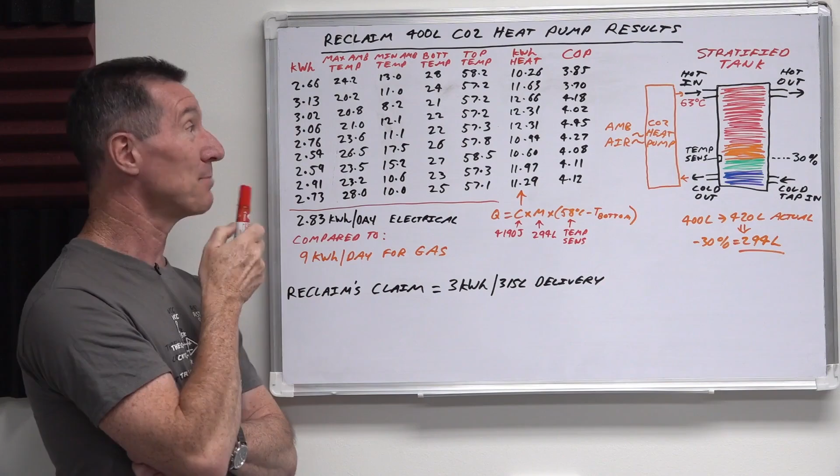And then it's basically free hot water after that. For those concerned that heat pumps are noisy - nope, it's about 36 dB, I think, and even if you stand right in front of it, you can barely hear it going full ball. So noise isn't a problem at all. It is for those larger pool pump heat pump hot water systems though.

In terms of reliability, I don't expect this to be any less reliable than any typical reverse cycle aircon. We've got 4 reverse cycle aircon systems, one of them's 18 years old and hasn't failed yet. Some others are like 10 years old and haven't failed yet either. So I don't expect this one to fail - it's a quality Japanese pump, I believe made by Sanden. I don't think it's going to die in the first 5 years, before it pays itself back.

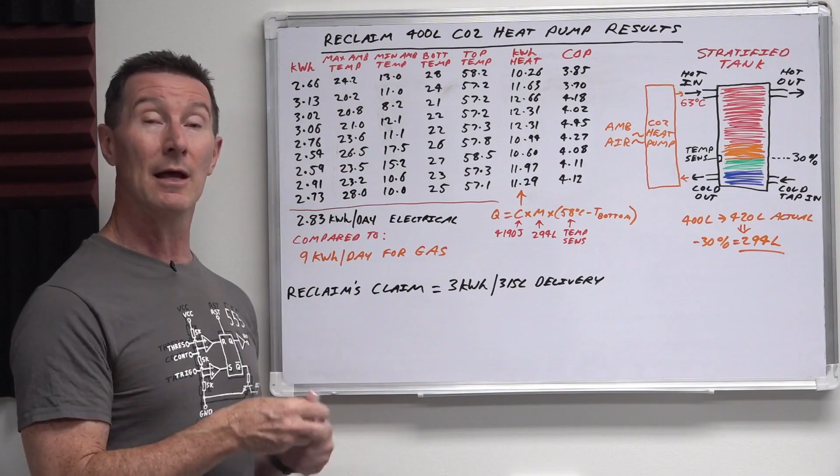I'd be very surprised. So I'm liking these heat pump hot water systems so far. Uses excess solar energy, it's a good choice, and certainly a good choice if you've got an electric element direct heating hot water system, as you saw before. Yeah, I didn't actually erase it - there you go. What was it?

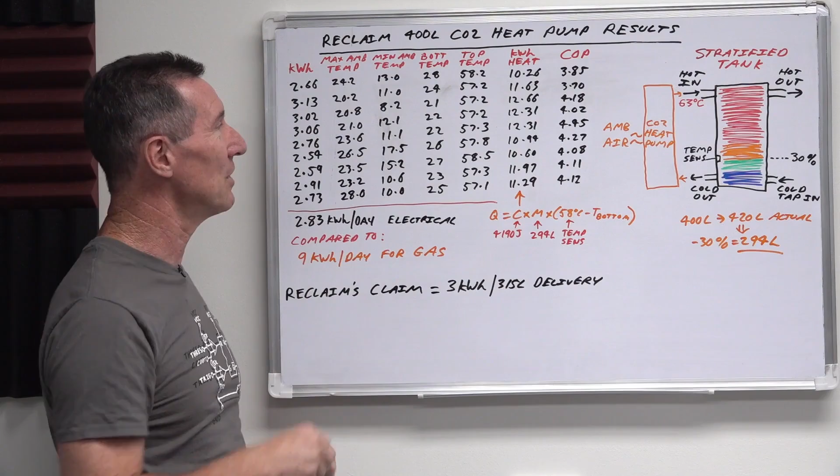It required the equivalent energy - no, I did actually have it on here - the equivalent energy of like 10 to 12 kilowatt hours per day or something, to heat up that volume of water across those temperature differences. So it is a significant advantage.

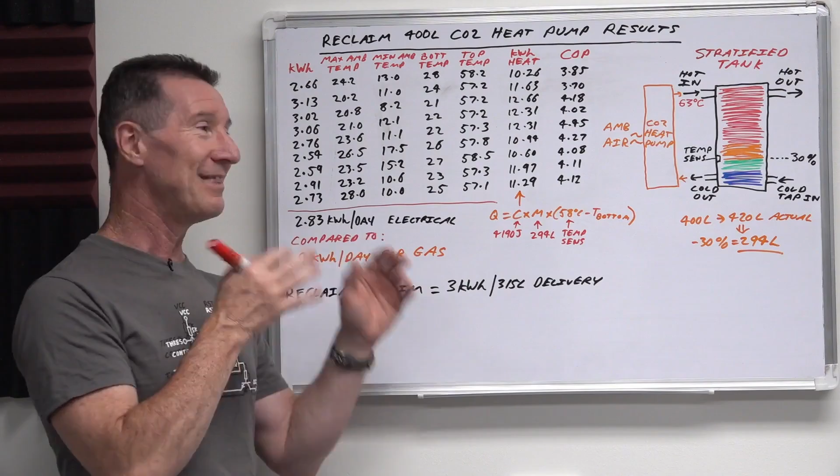As I said, coefficient of performance - you can achieve well over a coefficient of performance of 4 times. And no, this is not over unity, it's heat pump systems, okay? This is not breaking the laws of physics, Captain. Even though we're only putting in 2.83 kilowatt hours per day of electrical energy, we're getting out the equivalent of 10 to 12 kilowatt hours in heat energy - that's a different thing to the electrical energy used.

For those saying a 5 year payback is too long - well, we could have paid half the price of this system at least. In some states, I believe you can almost get them installed for free with government rebates. But those are real low quality, made in China crap systems. The company that installed ours refused to even install those crappy bottom of the line systems - they just break down, it's not worth it. So yeah, you could save some money up front.

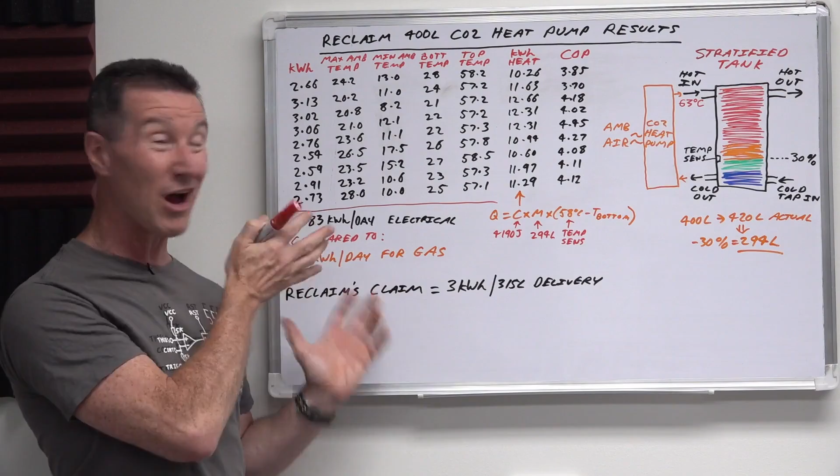But we paid extra for a top of the line, made in Australia system with a Japanese pump, and it should last quite a long time, I hope. Anyway, I'll come back in a decade, or 5 years, and give you a payback period update. With rising gas prices here in Australia, and it's happening everywhere, the payback could even be shorter than that. So there you go, heat pump hot water system.